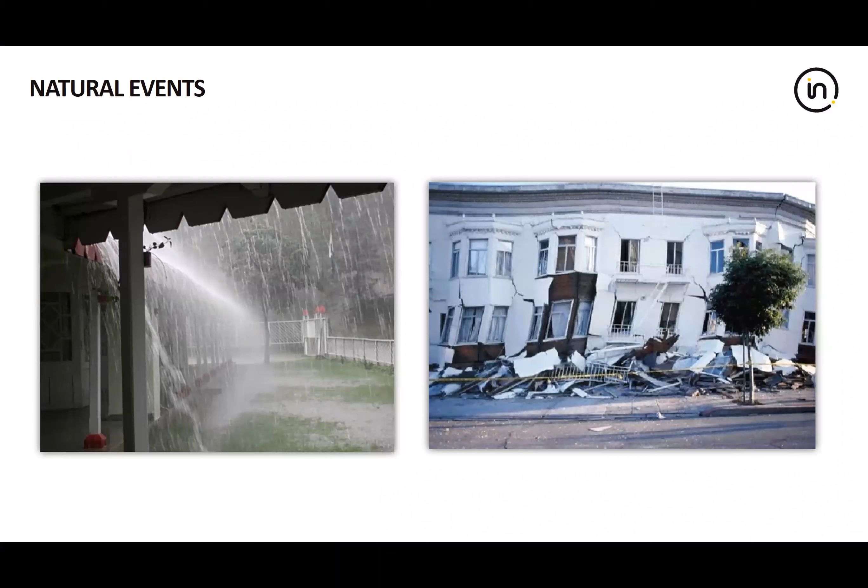So why do we test? There's many reasons, but I'm going to briefly go over a couple of natural events: rainstorms, earthquakes, extreme heat, fire. Maybe I should have added a lava picture here from Hawaii. It's unfortunate to see what's going on in Hawaii right now. There's not a lot of things you could do about that, but that's another natural event that can happen.

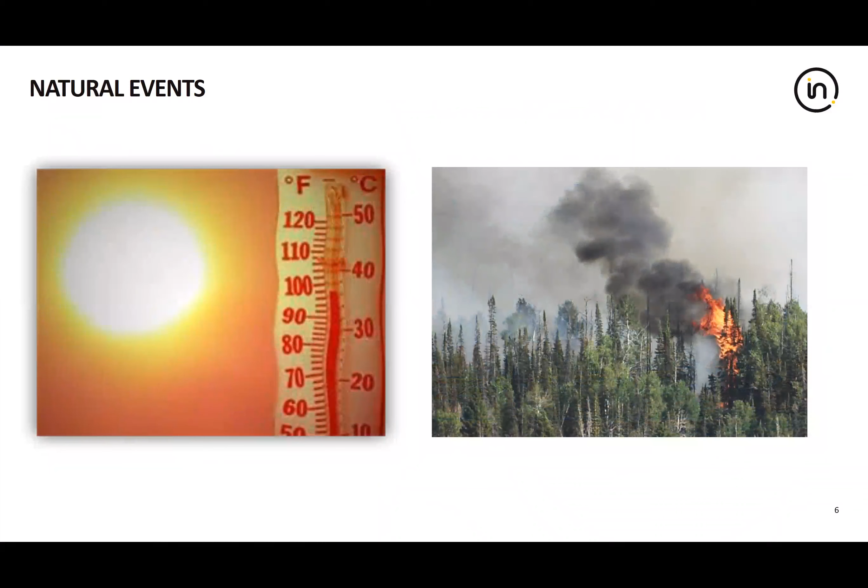Extreme cold, you can see some ice forming. If you don't mind muting the phone, please, I would greatly appreciate that. Maybe it's stopped. Nope, still ringing. Okay, somebody answered this. Nope.

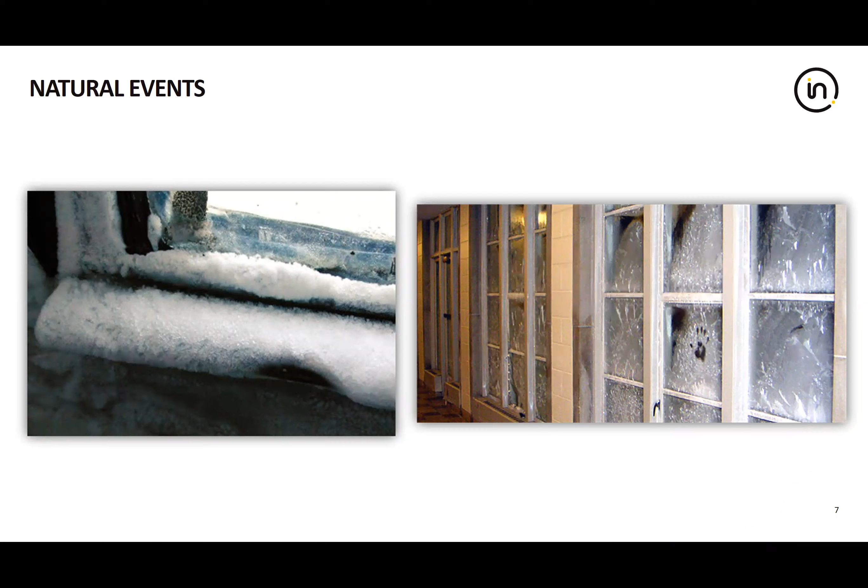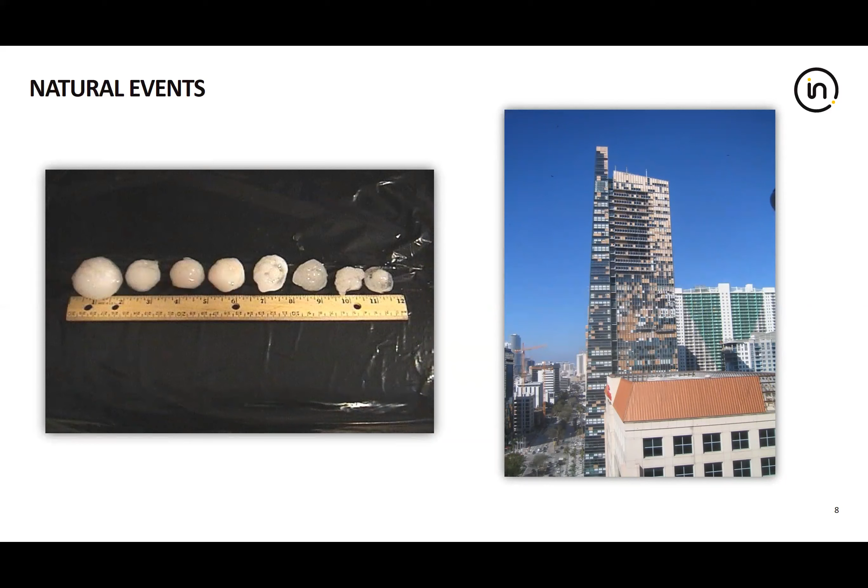All right, so extreme cold is another reason we do these types of tests in the lab. Hailstorms, we see that this time of year in a lot of different places, and of course hurricanes and even tornadoes. Those are some of the natural events that are some of the reasons why we test. And then of course there's some man-made events. Maybe bomb blasts could be natural also, or an accident, but more and more times we see them as man-made events. Noise is big, not just because of airplanes, but because of highways, New York City, big cities where the buildings are all right next to each other, and there's trains and traffic and people and fireworks and so forth. More and more the codes are calling for stricter acoustical numbers on all systems being used.

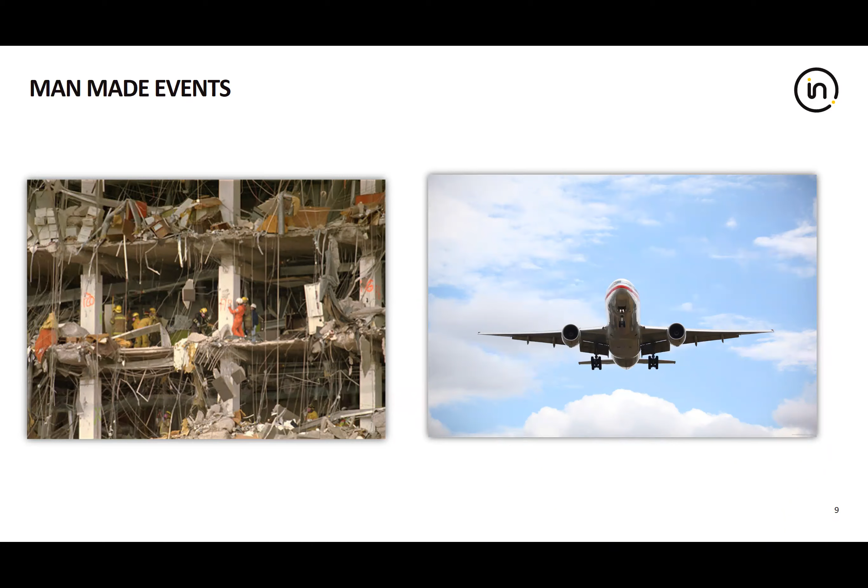So, benefits of pre-construction lab mock-up testing. Some of the benefits of lab mock-up testing are to make sure that the facade will hold up structurally and also not have any problems with air and water infiltration. It's also a way to make sure the facade can actually be built - sequencing, logistics, and so forth. But of course, we also have to meet building code, contract, and project requirements. That last bullet there is usually why we get called up to give a quote for mock-up testing and so forth.

On the right there, you see several mock-ups being tested at some of our labs. I'll try to describe some of these pictures as I go forward. Some of the wall performance characteristics that are looked at for mock-up testing include air and water infiltration, structural performance for wind load, thermal and condensation evaluations because of temperature and weather, building movement, seismic, durability, and some special testing that we've done more and more of, like acoustical testing, hurricane impact resistance testing for hurricane-prone areas, and bomb blast testing. Bomb blast testing and acoustical testing can be done on a separate unit instead of the mock-up.

Acoustical testing we usually do on a separate unit of specific size, usually the same unit tested for thermal. But we've been asked recently, in the past 2 years, to do acoustical testing on the mock-up itself, a 2 to 3 story unit with a corner.

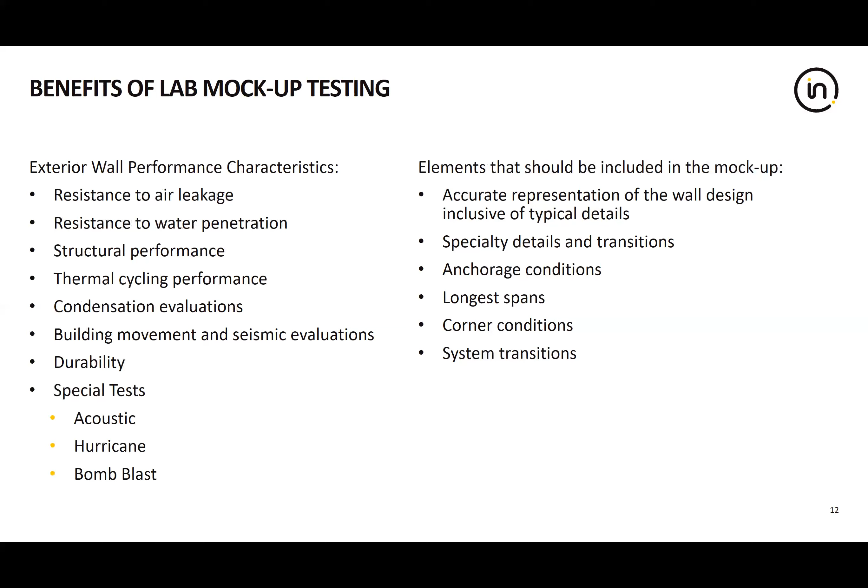We have to know that way in advance, and we have to build the chamber differently so we can get a true acoustical reading. When building a lab mock-up, you need to make sure it's just like what's going to be done in the field. You want to include all the elements that will be used in the real world for the project. That's very important.

So now let's go into some of the keys to success while you're in the lab. One key is selecting the best venue. I won't say anything more about that.

Safety and lighting conditions are very important. We have safety guidelines you need to follow when going to any of our labs. You see a video, all our technicians have to abide by them, and visitors have to abide by them too. Lighting conditions are important. Our labs test inside and outside, so you want good lighting conditions where you're testing.

Easy access is important. You want to make sure you can set up your chamber properly, with room around the space to work and bring in your equipment and materials.

Equipment - you've got to go to a lab that has the right equipment. Some labs have more equipment than others. The lab might have to rent something specifically for the size or condition they weren't ready for, so that happens.

And then you have to be able to deal with delays. Delays happen, and it's not always the lab's fault - it could be weather, failures, material delivery, and so forth. Those are the main 5 keys to success for mock-up testing.

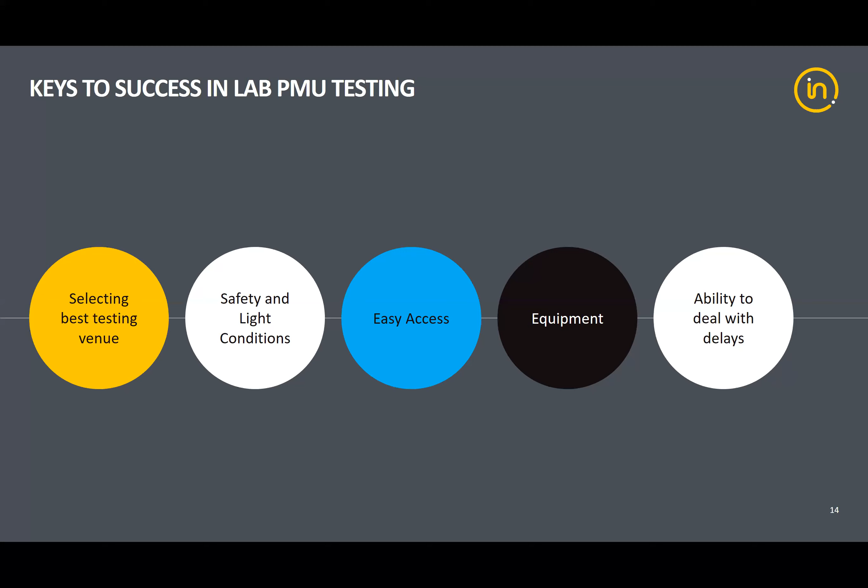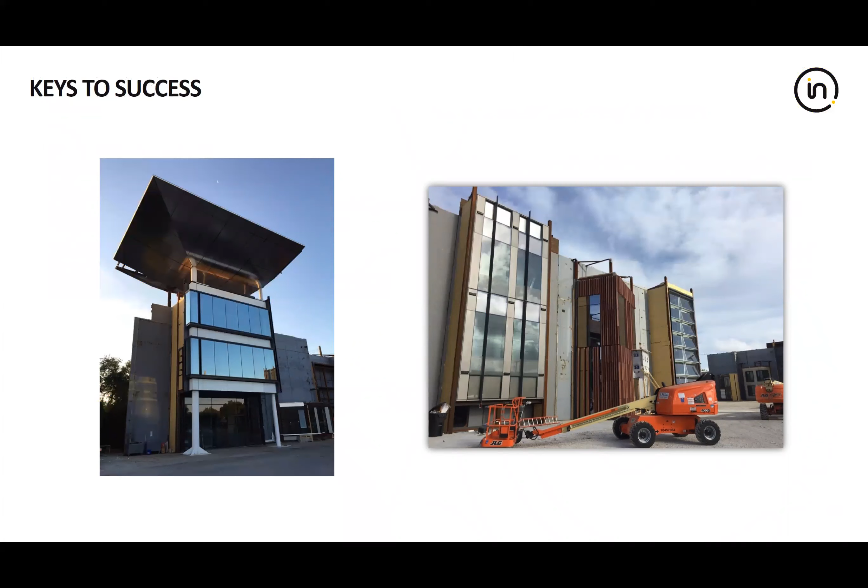The picture on the right is an example of 3 separate mock-ups, showing how they can be installed in proximity to each other with still room in between for people to work and have space during testing, construction, and takedown. Both of these pictures are from our facility in West Palm Beach, Florida.

You want to understand the project performance requirements relating to the exterior wall, and review the test methods required by the project specifications. The basic tests called out for mock-ups are usually air, water - both static and dynamic - thermal testing, wind load, and static load tests, with seismic and acoustical sometimes added. But the basic ones are air, water, structural.

You've got to let us know, or we have to see in the spec, if there are any special testing requirements like seismic, thermal, condensation resistance, bomb blast, or missile impact, so we can make sure to cover all that.

Make sure you include an accurate representation of the wall design, inclusive of all typical details. Some of the more important things to include in the mock-up for testing are all the different anchoring types in the unit, any support conditions, corner conditions - both inside and outside corners - and the longest span from floor to floor. You want to make sure you include that.

Sometimes as a lab, clients ask us to quote a mock-up based on a project spec, and they have the drawings, and the architect or glazing consultant has already told them what to test and what it's going to look like. That's very simple for us to work with.

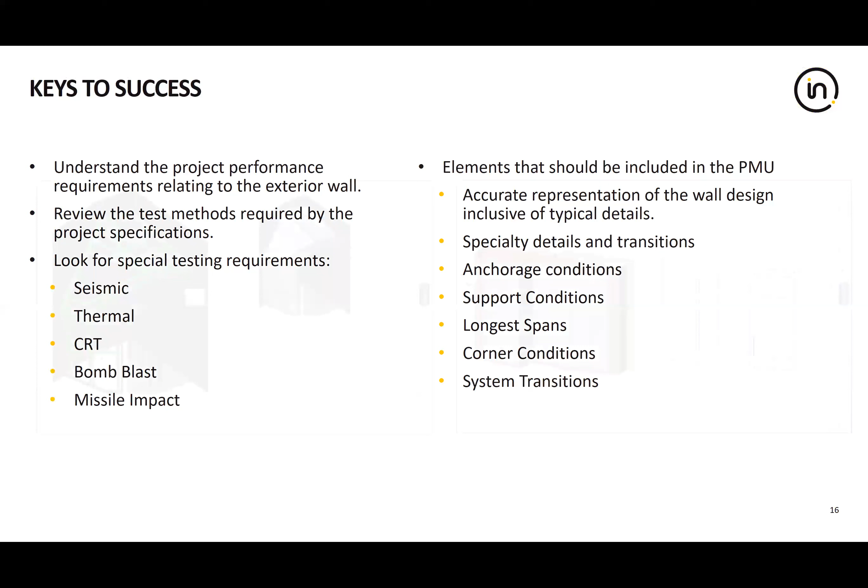You want to allow adequate time in the overall project schedule for approval of pre-test submittals. Mock-up drawings are a very important part of that.

When you send us a project specification with the basic elevation, the lab provides a quote for testing. Then our drawings department puts together a set of drawings that relate to the job conditions for the project, to make sure you're installing into what you're going to see in the field.

The formal test procedure is also very important, you want to make sure you have that. Usually that test procedure is part of the specifications for the job, or it's written in another document by the glazing consultant hired for the job. We retype it, put it on our letterhead, make sure it's correct and in the right order, and you have to sign that off before we do any testing.

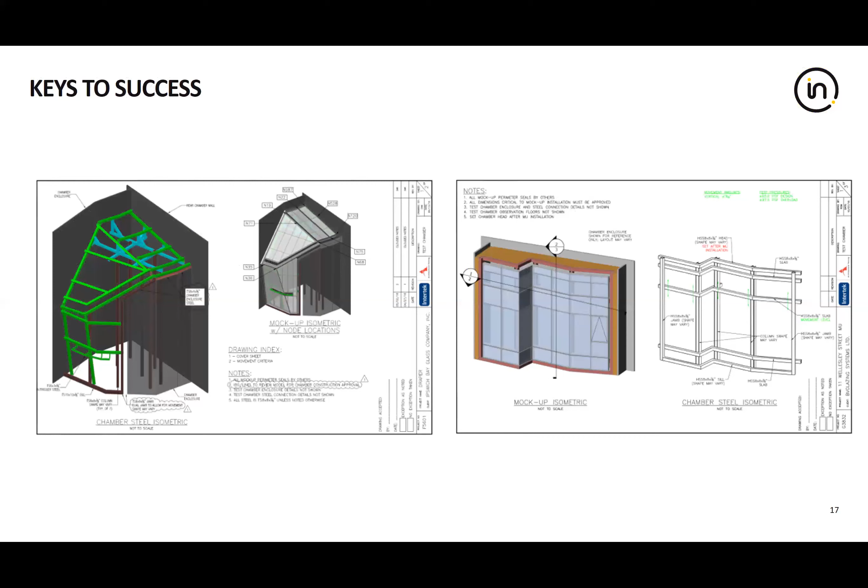You want to accommodate any special tests in the chamber design. Like I said earlier, acoustical testing has come up on some of the lab mock-ups we're doing, so we want to build the chamber the right way. Seismic movement, interstory drift, and condensation analysis - we need to know all that in advance before we move further.

Like I mentioned just now, the formal test procedure is very important. It should include any pre-testing, pass-fail criteria, design pressures, and any seismic requirements or additional testing required for the job. We need to make sure it's correct at the very beginning.

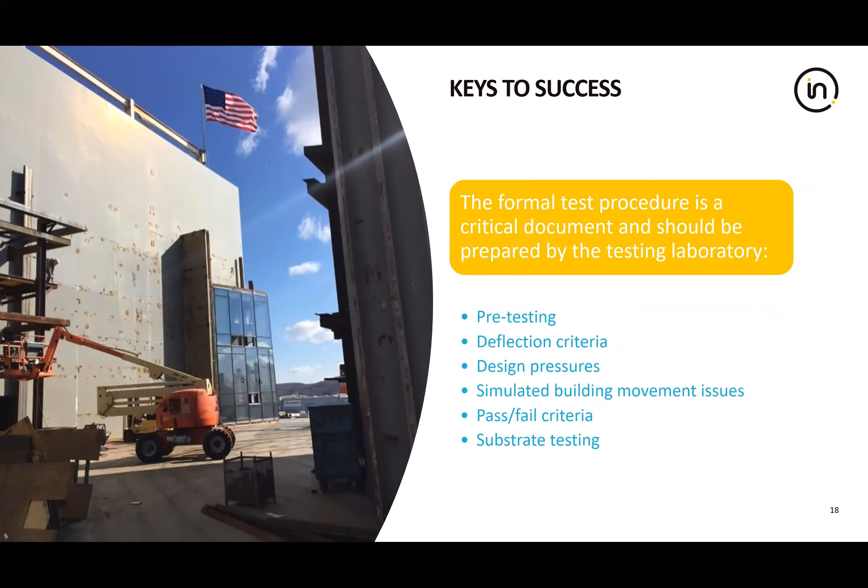Placement of the test chamber is very important for both installation and testing. Like I said earlier, all chambers are different - you saw that in the drawing I showed just now. Make sure you have the necessary equipment to work on your unit, and maintain accurate and up-to-date drawings. That's very important from the very beginning through testing.

Make sure you have accurate drawings that are up to date, and let us know if anything changes as soon as possible. It's important that the lab knows of any changes as they occur, so that when you come to test, everything's ready and we're not caught off guard.

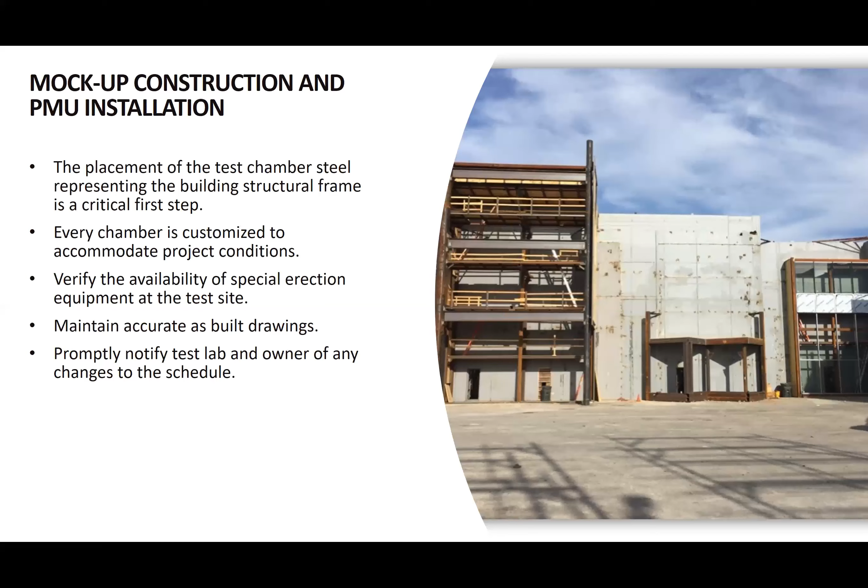Prior to testing, make sure that all people working on the project are on the same page. Send out the mock-up schedule in advance. That schedule should include the installation time of the mock-up, time for visual inspection, sealant cure time for the unit, planned testing duration, remediation and retesting, a report time frame, and also dismantling.

This process can usually, I would say 3 months is how long a unit, from experience, will be on our wall from start to finish - from clearing the wall, building the test chamber you're going to install your facade on, to testing, to takedown. It's really a 3-month process.

Lately I've seen some projects at several of our labs where the developer or the architect or whoever's paying for the job - which can be the glazing contractor, general contractor, developer, or architect - have asked us to keep the unit up on our wall for longer periods of time, just as a visual mock-up to see what's going to happen to the colors and things like that. So we can do that also if needed.

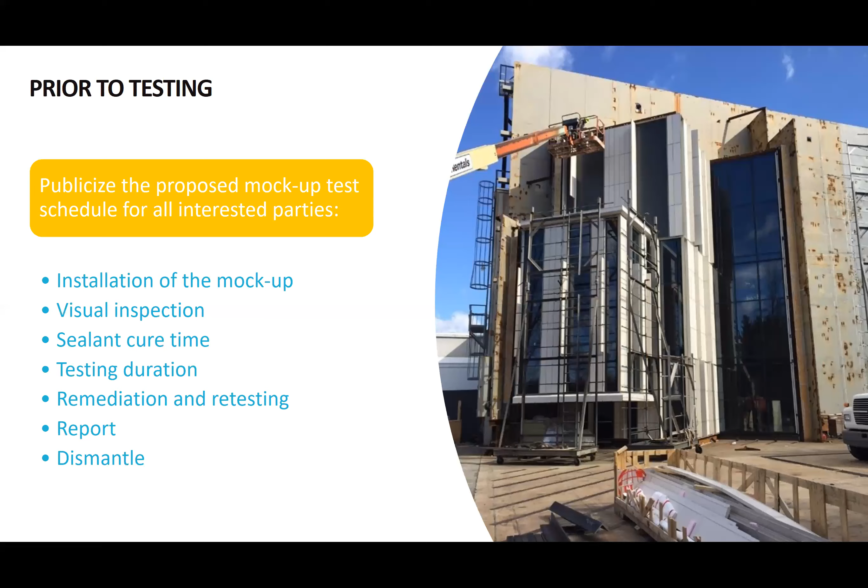In addition, prior to testing, you want to create a test plan, but also determine the required observers - who's going to be there. Inform the observers of the schedule for each test sequence. You don't want people just sitting around standing by the test unit when it's going to be a 3-hour setup time for the next test, especially something like a water test or a thermal test. That takes time to set up, so make sure they know what that schedule is going to be.

Advise all interested parties that schedules will be dynamic.

Just know, 90% of all mock-ups require some form of remediation during the test phase, and that's not just because of failures. That could be because they ran a 12 or 15 PSF water infiltration test, and the client wants to go higher just to see if it can meet a higher water design pressure. So that can happen also.

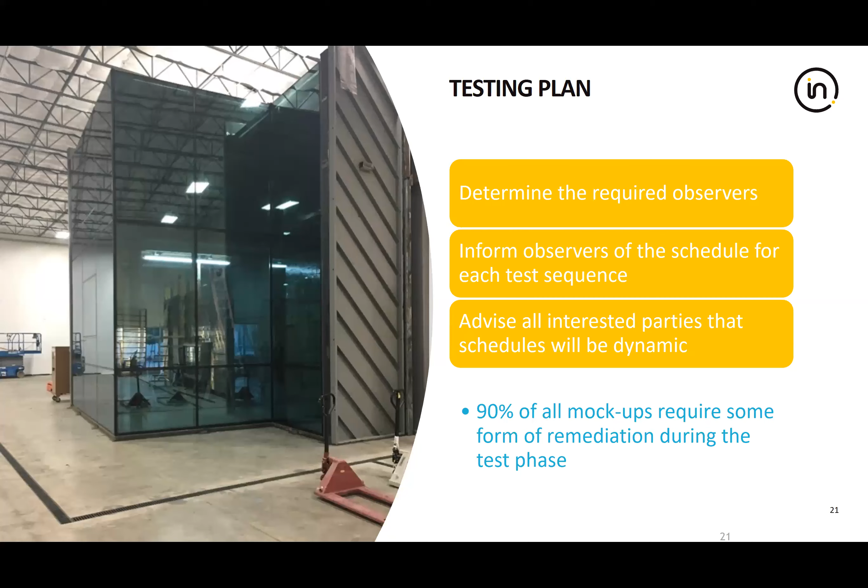During testing, don't forget these notes: carefully analyze your test results, please. The cause of premature failures must be determined - it could be excessive glass deflection, glass flaws, anchor failures. Those could all be contributing factors.

Make sure you understand the results - make sure you understand what happened. The failure could be workmanship or it could be design.

Avoid the temptation of Band-Aid remediation. You don't want to just keep adding silicone in certain places or make changes that would be a drastic change to the process you're going to be using in the field. You want to make sure that whatever change you make is going to work in the field.

And of course, during the process of analyzing the results and making any changes, you want to involve the design team - the owner, architect, general contractor, or anybody else that's involved. Very important.

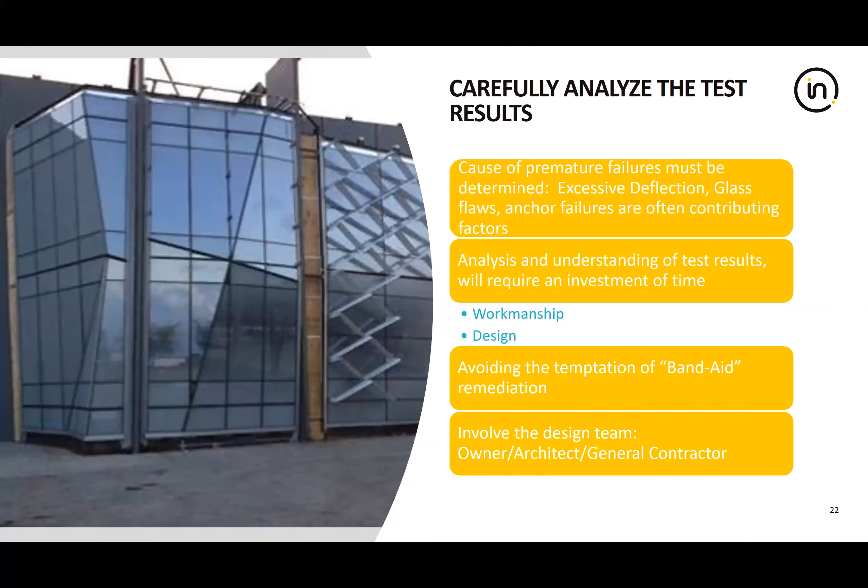Field testing. So why do we do field testing? I just went over some of the keys to success for lab mock-up testing. Lab testing is performed on prototype specimens to certify or validate product performance ratings or job specifications because the job called for it.

Field testing, quality assurance field testing, is performed on newly installed products to verify installed performance of the product and the installation. We've been doing field testing forever, just like mock-up testing, and it can be done at one time during construction, or at 10%, 50%, and 80% of construction. We keep seeing more and more in specifications that field testing is done at several times during construction to make sure units are being installed properly.

The third type of testing for a project would be forensic testing, usually performed on wall assemblies with known water control problems as a means to accurately identify suspect wall construction components and details. Every year we get caught up in cases where water's coming in where it shouldn't, and we get asked to go in there and investigate. So that's another reason.

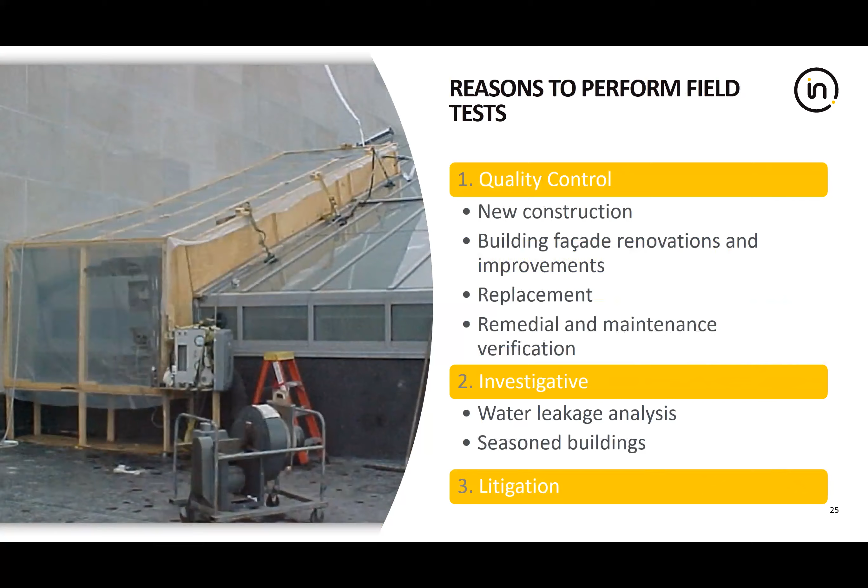The most common field tests are for air infiltration or air exfiltration, which is ASTM E783 in the field. Water penetration testing could use ASTM E1105. Those two, air and water, are also called out in specifications like AAMA 502 and AAMA 503.

AAMA 501.2 is a very popular test, which is the spray nozzle test, where somebody stands there and just holds the nozzle back and forth. The E1105 is more of a spray rack test with a chamber on the inside.

Lately, more and more, we've been asked to do dynamic water testing in the field, which is AAMA 501.1. That's usually done on a mock-up with a fan, an airplane engine. We also have some smaller devices that we can take in the field. I think I had a picture of it right there - there's one of our wind devices that we take on the field.

The good thing about using that device in the field is that you don't need a chamber on the inside of the unit, and you can test more units at a time. It applies wind, it's a dynamic wind while spraying water at the same time. So more and more they're asking for 501.1 in the field also.

Other common field tests are structural performance testing, and then some specialty field tests like acoustical. Acoustical has been a huge growing field in the industry for acoustical field testing. Thermal evaluations, glass evaluations - we get called for job site inspections for bow, warp, and frost point, and so forth. Masonry anchor, shear and tension tests, masonry wall absorption, tracer smoke.

Another big one that we're doing a lot more is blower door, whole building air testing. That's also a type of test that we're doing more and more, specifically in the Northwest. A lot of the states have requirements for whole building air testing. And then, of course, roof testing - we do a lot of testing on roofing products.

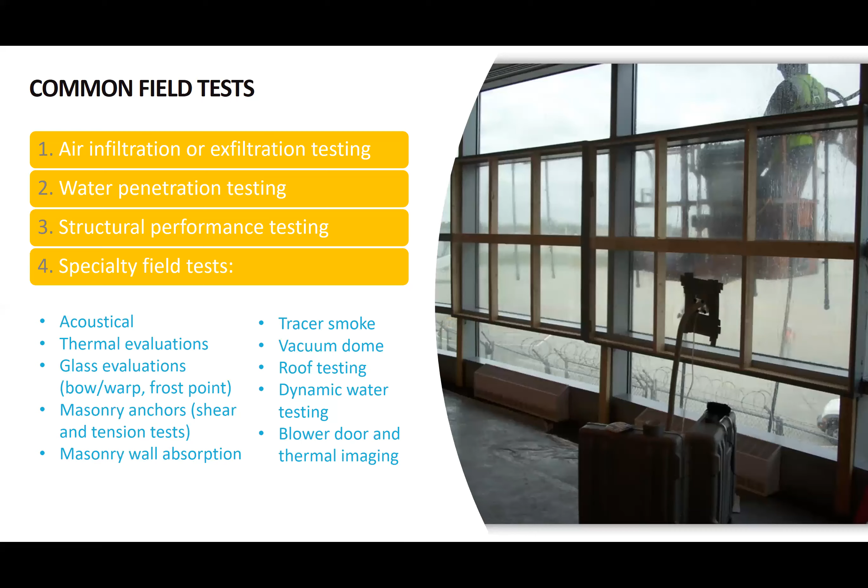That concludes my presentation on building enclosure testing. I'm up to 20-something minutes, I think I did okay. Thank you very much. Does anybody have any questions?

Oh, right. Or maybe I lost everybody and I've been talking to myself. Sarah, are you there? I'm here, yes.